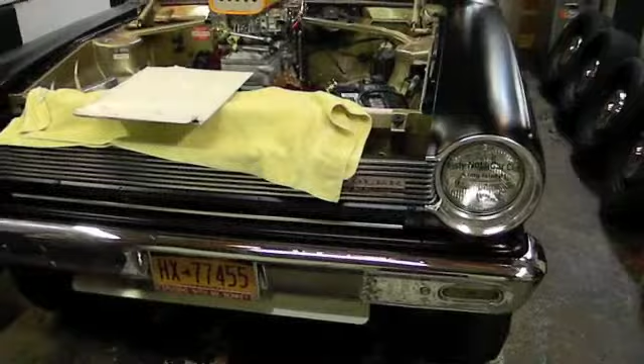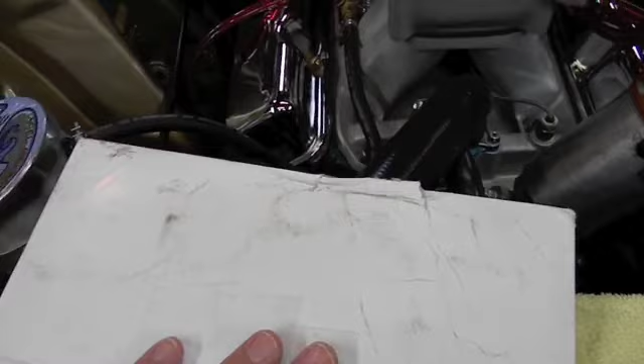I won't show the name and address, but I'll just say this: this package went for a ride. They should be ashamed of themselves. It was even opened - I closed it back up.

So the mail call is from Tom Noble. He sent me the book he was talking about. Now if anybody knows me, they know I'm into reading material. I'm not going to say I sit and read books upon books, but I read books like this. I always have since I was small.

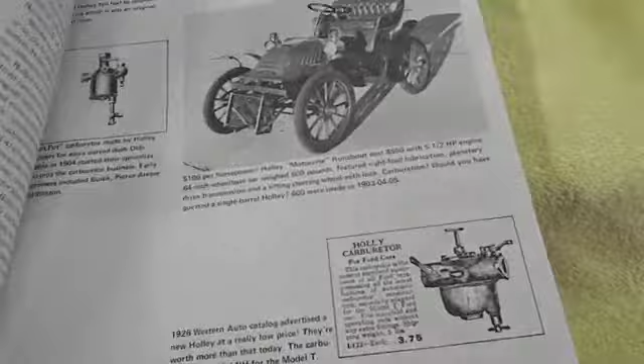What I like about this book is when you go into it, the date - it says printed in the USA, with a copyright of 1976. But there's a thing in here where they talk about the brand new 1978 model carburetor, which I thought was cool.

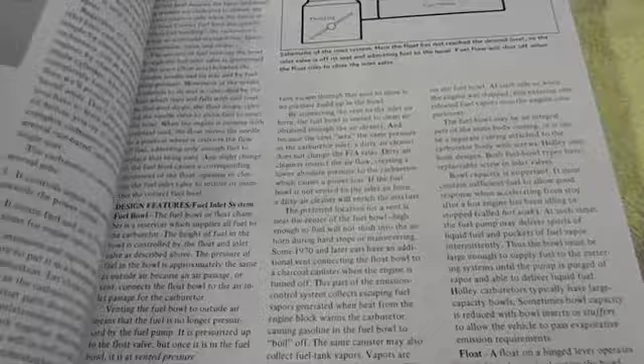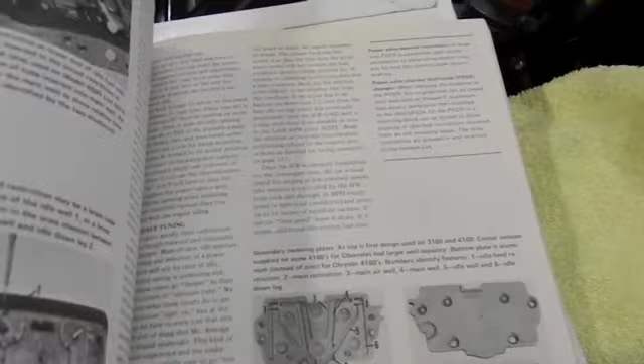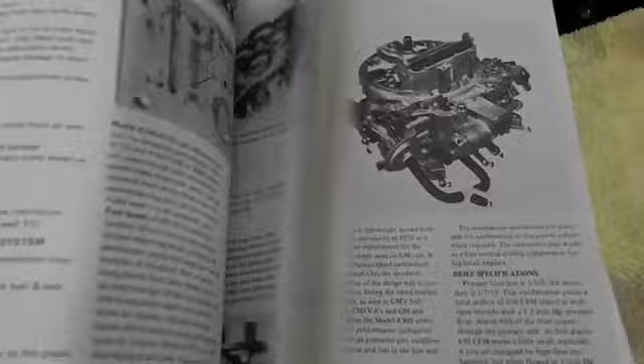Definitely very interesting, I skimmed through it. First time I ever saw a Dominator carburetor with chokes - I don't know if that's a prototype, I've never seen one of those.

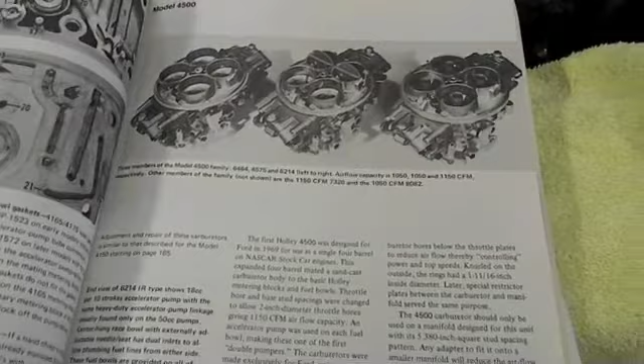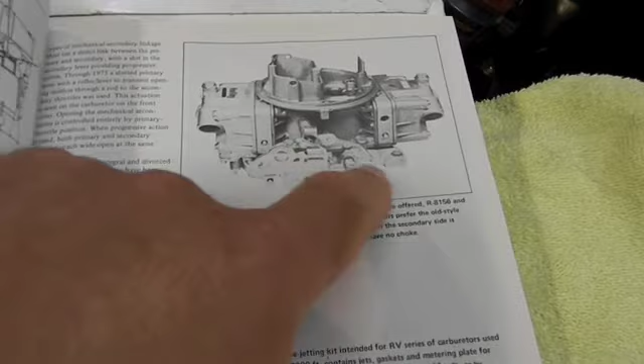So yeah, this was new in '78. This is the carburetor I had on my wagon to begin with, that different style secondary setup. It's a nice carburetor, I should have never sold it - because that's the one that would be on Junior's motor.

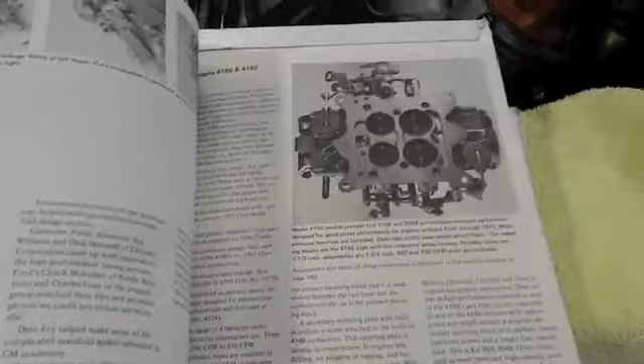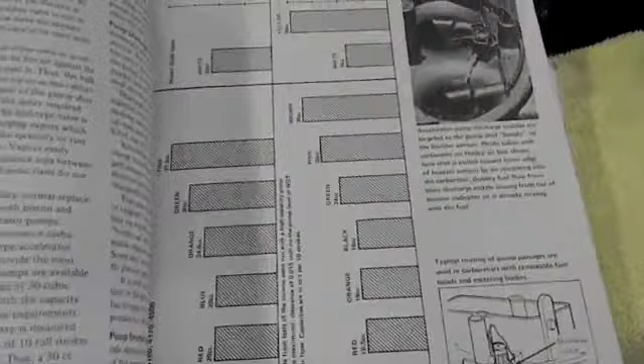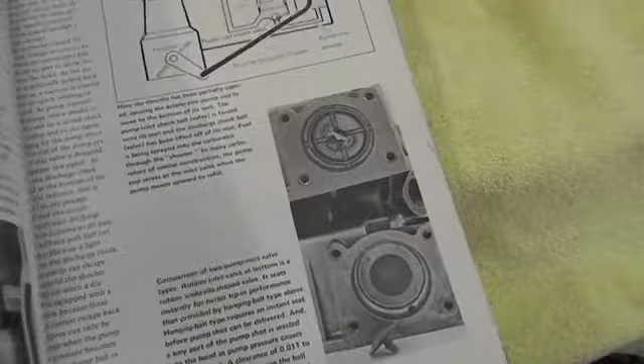But definitely good, they talk about... what should we call it... they show you how to set up the accelerator pumps with the different colors, the different nozzle sizes, the two different types of accelerator pumps - the one with the little check ball, the one with the little flap of rubber - the pros and cons of them, different power valves, different bowls.

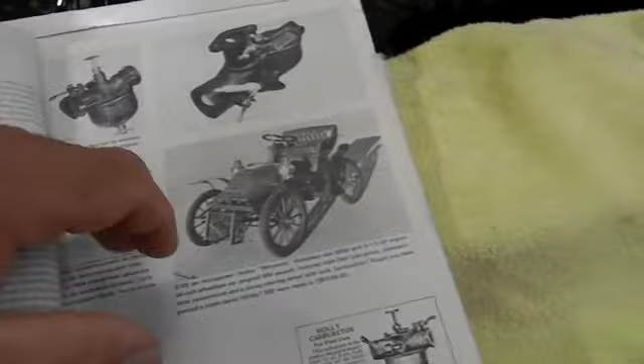They talk about fuel ratios, what's ideal, how to select the carburetor size, all the good stuff.

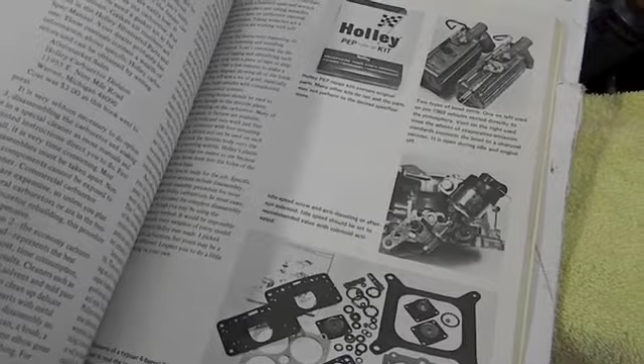I have to say thank you. I've already skimmed through this book for like an hour before I walked out here. There you go, there's a classic picture.

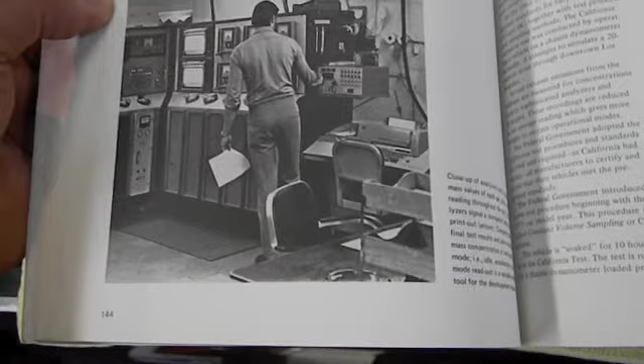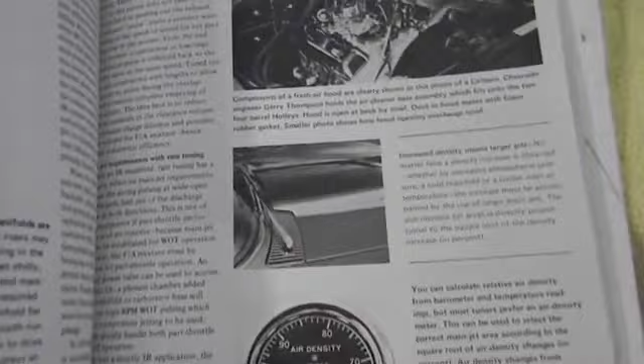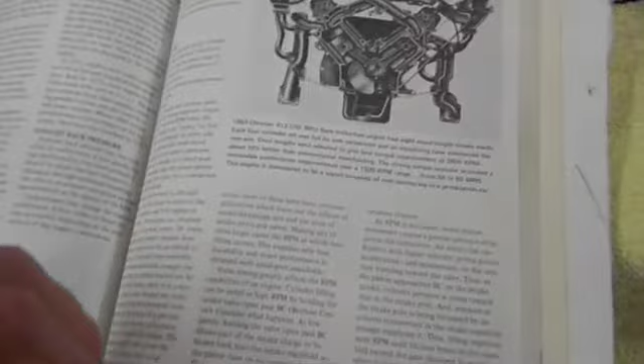They show a lot of cool things in it. They talk about air density, measuring it. They show a cowl scoop, a couple of air pans. They talk about the Street Dominator intake manifold, which was the big rage in the 70s. They show you the original Chrysler Cross Ram setup, or Ram horn.

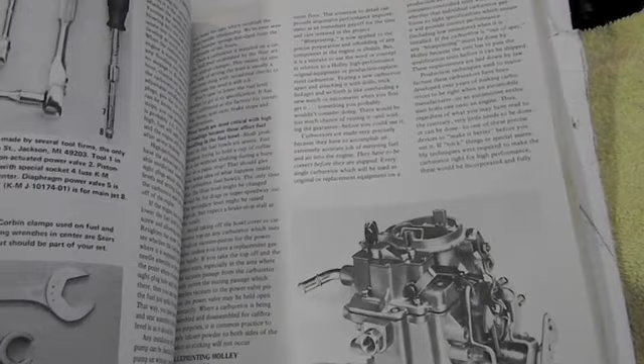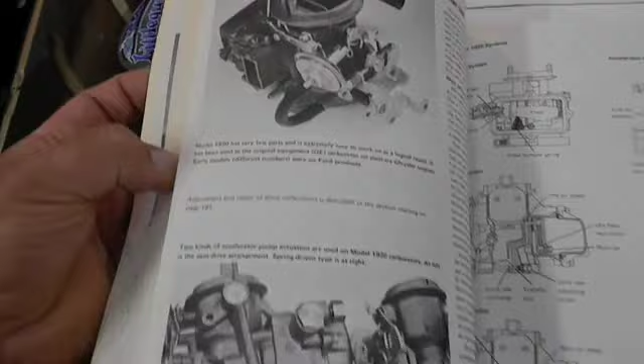But like I said, it's only Holley, so they don't show anything from Edelbrock, Weiand, Offenhauser, or Carter, or nothing like that. So they actually show regular production carburetors as well.

So like I said, thanks again. This is very interesting right here - here's this page.

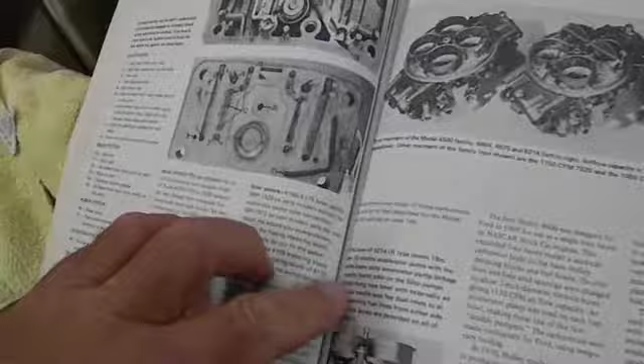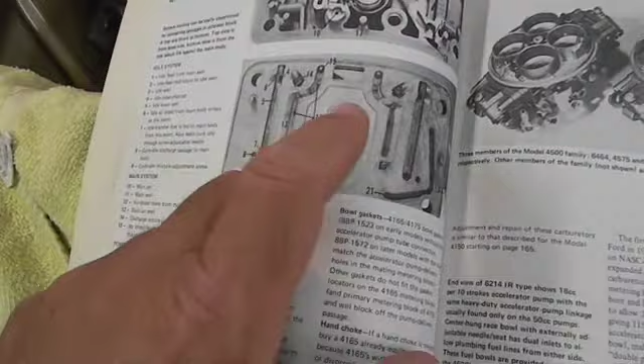There was another one of them. It breaks down all the different passages in the metering plate, tells you what every one of them does. I know there was a picture, I just passed it - it shows you what every passage does in the carburetor itself.

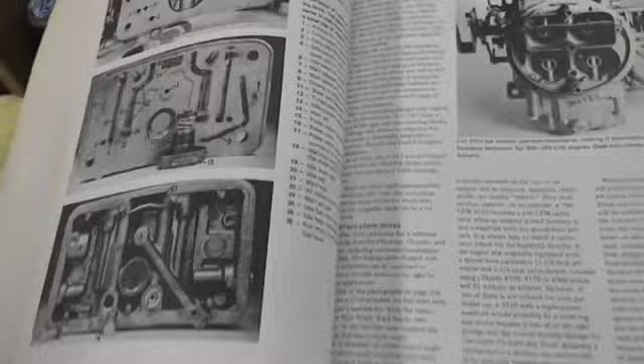On the opposite side of that, it labels it all for you. So if you're having a problem, for argument's sake just off idle, you can go and find out what passage is actually clogged. You don't have to take apart the carburetor and go through every passage wondering - you can actually diagnose it.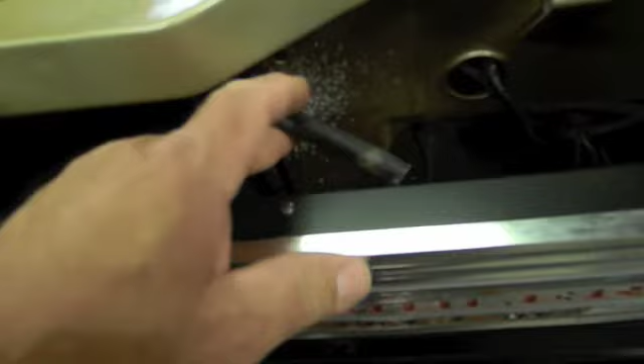So with that, we got a couple things to do here. We got to put a catch can back on. As you can see right there, this thing must have been whipping around in the wind, so I topped it off. We need something - the emu egg is no longer, it actually got broken accidentally by my wife, but I forgive her. So with that said, we'll do a couple things to the car and just hang out.